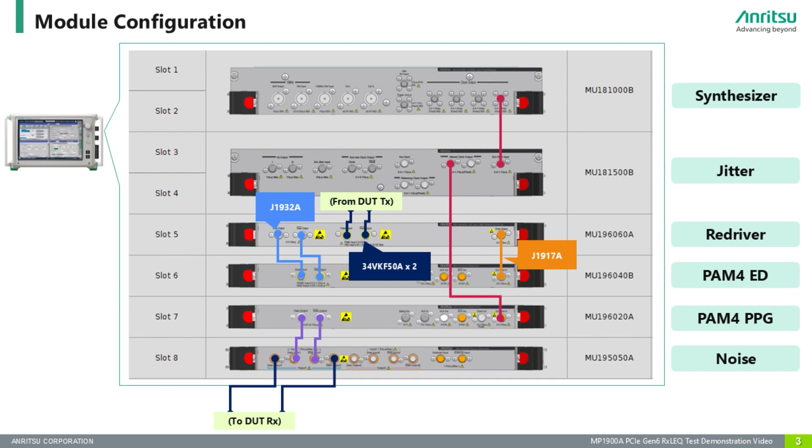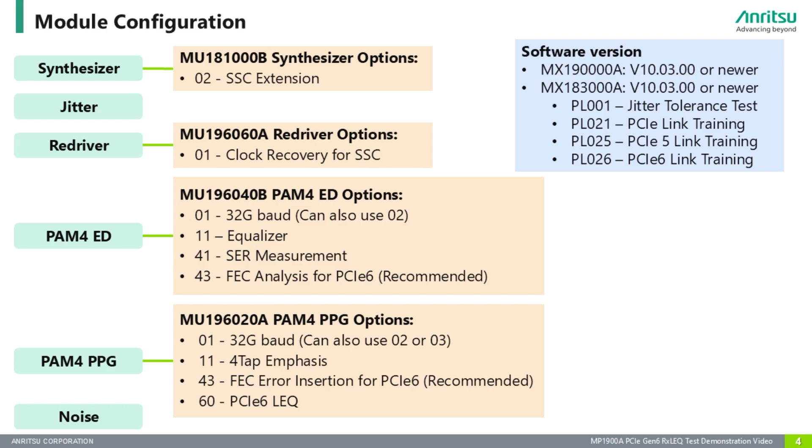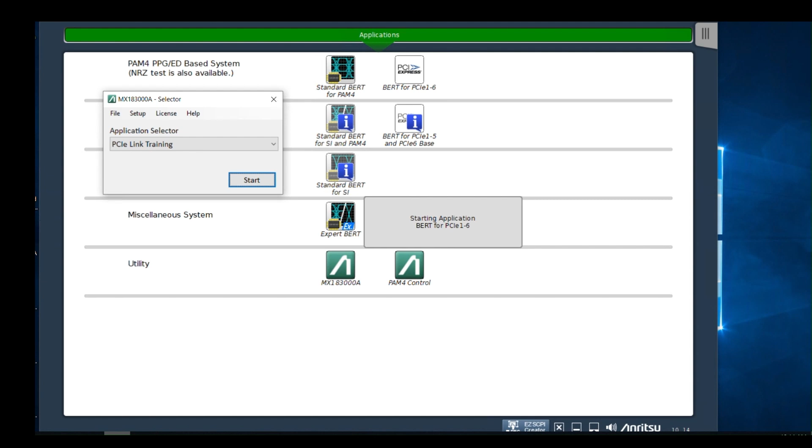These are the required module and software options. Next, let's move on to the test preparations. Launch the MX190000A software and select BERT for PCIe 1 to 6. Also launch MX183000A. Ensure that the module FPGA and firmware are updated.

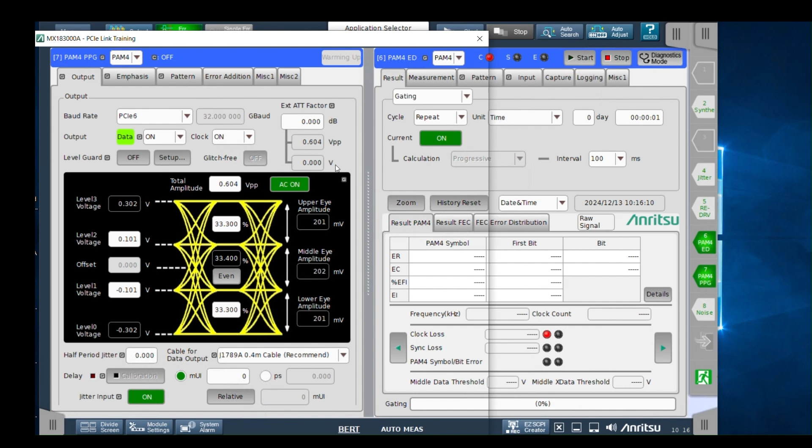Once the main application has finished launching, switch to the MX183000A screen and start the PCIe Link Training application. Click on Start Search and Connect. Click on File and initialize the parameters of both applications. After initialization, click on Operate MP1900A and move to the redriver screen. Turn the CTLE2 on and return to MX183000A.

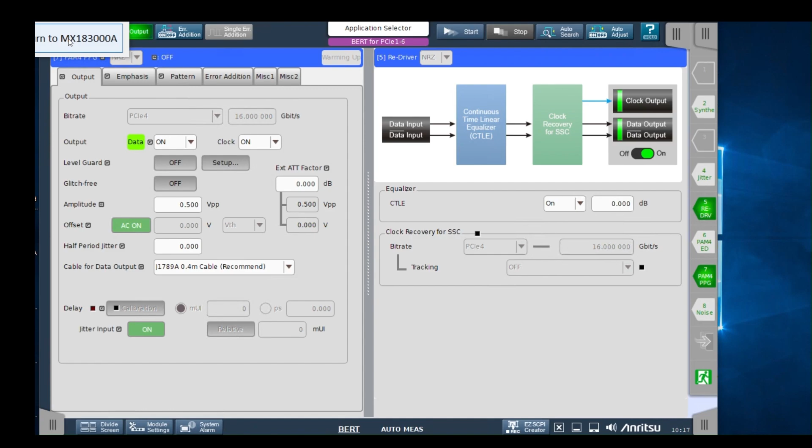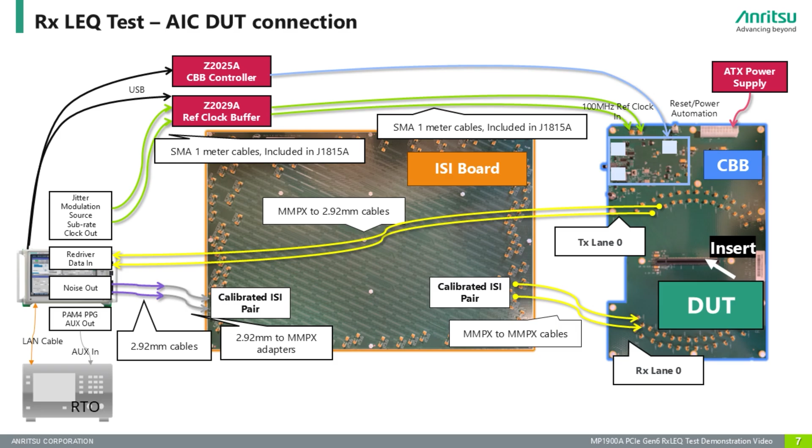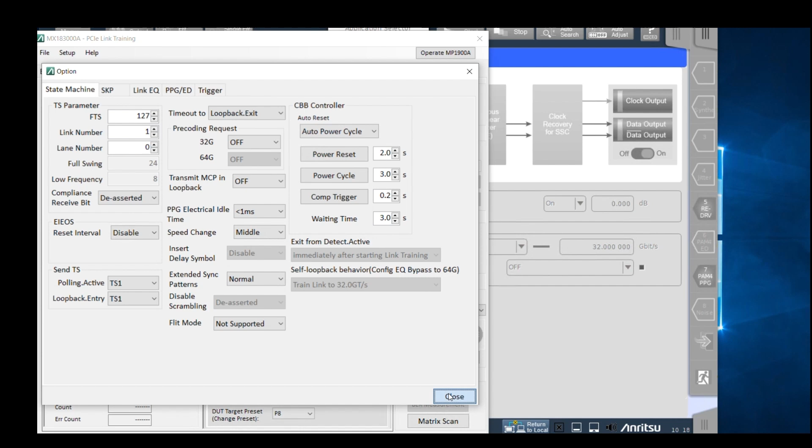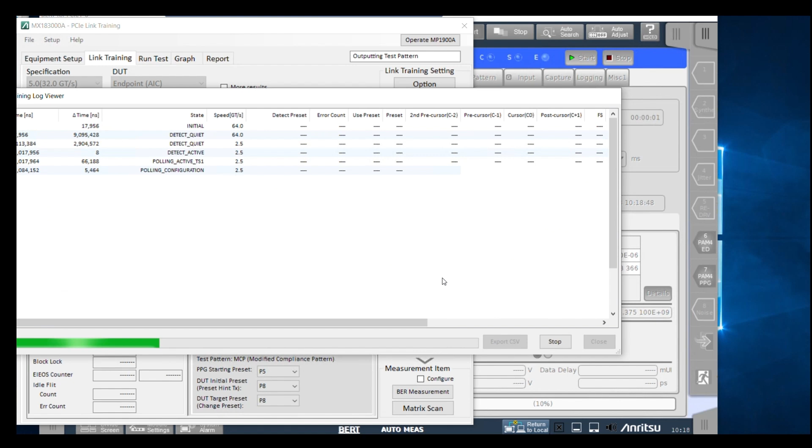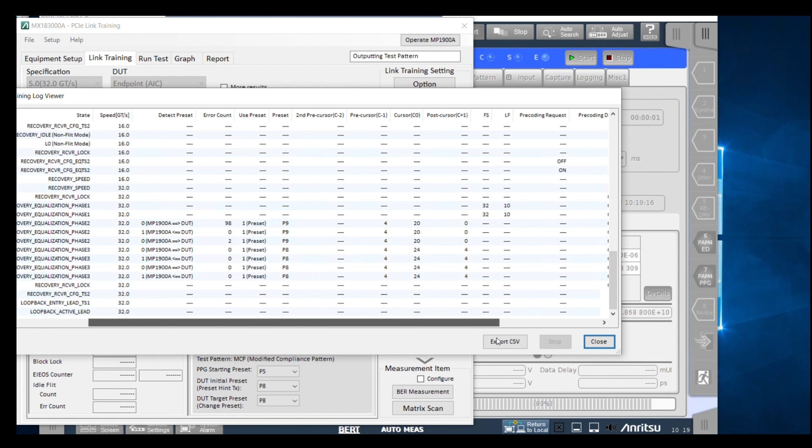With the LEQ test set to RxLEQ, click Apply. Click on the Option button to select the appropriate CBB controller settings and start Link Training. We achieved loopback active at the Gen 5 data rate. Click on the LTSSM log button to display the Link Training state transitions. Adjust the delay as needed to achieve the optimal bit error rate.

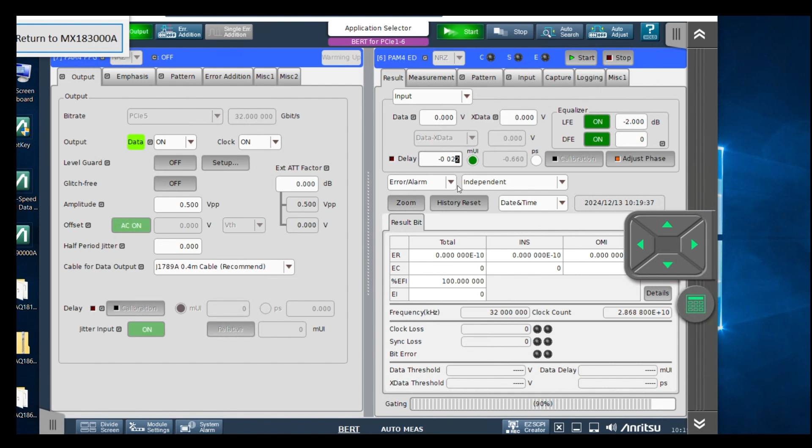Now, let's try Link Training at the Gen 6 data rate. For RxLEQ, presets from Q0 to Q10 can be set as the PPG starting preset and DUT initial and target preset. In the More Results tab, Gen 6 information such as 1B1B control skip, SRS clocking, and Flit mode supported bit can be displayed after Link Training.

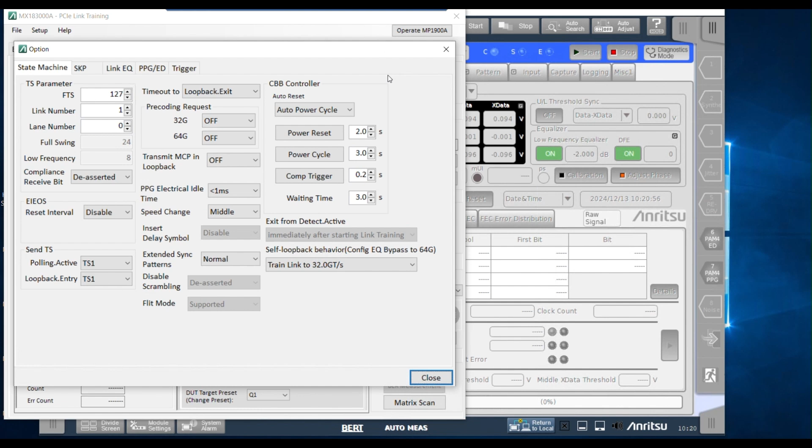In the Option tab, 1B1B skip interval settings, fine-tuning of link equalization presets, redriver CTLE, and AUX trigger output can be adjusted if necessary. For the Gen 6 PAM4 signal, in order to optimize the redriver and ED parameters such as threshold voltage, delay, and CTLE, perform return path optimization. This method uses the compliance mode of the PCIe device to instruct it to generate Gen 6 compliance patterns with the different presets. The compliance mode toggle signal will come from the MP1900A TX.

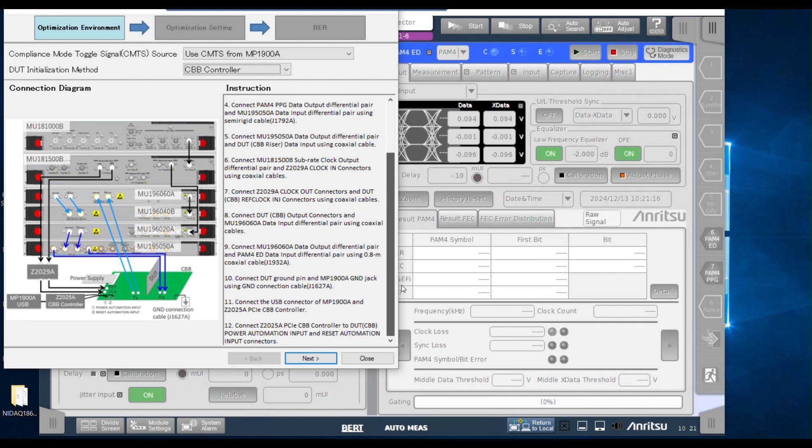Select the DUT initialization method. In this demo, we'll use the CBB controller. Select the auto reset method. Next, select the presets for optimization. And click on Start Optimization. The MP1900A will start putting the DUT in Gen 6 compliance mode for the selected presets. Using the DUT signals, the MP1900A Rx parameters will be automatically optimized.

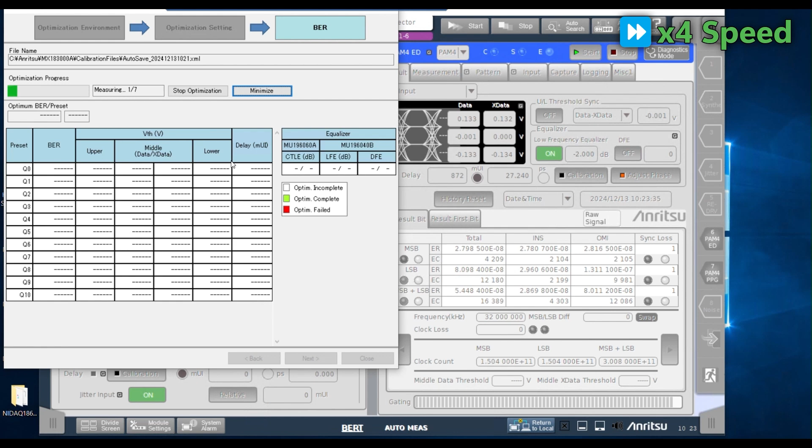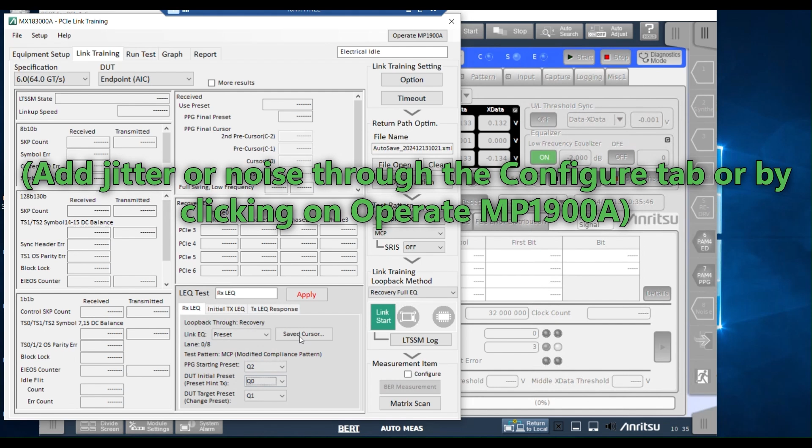We can see the optimal parameters, along with the resulting bit error rate in the table. This process will be repeated for each selected preset. After the optimization finishes, the best BER and preset combination will be displayed. Click on Close to proceed. Change the RxLEQ settings if necessary and click Apply. Note that you can add the necessary jitter and noise through the Configure tab or by clicking on Operate MP1900A. Then, start Link Training.

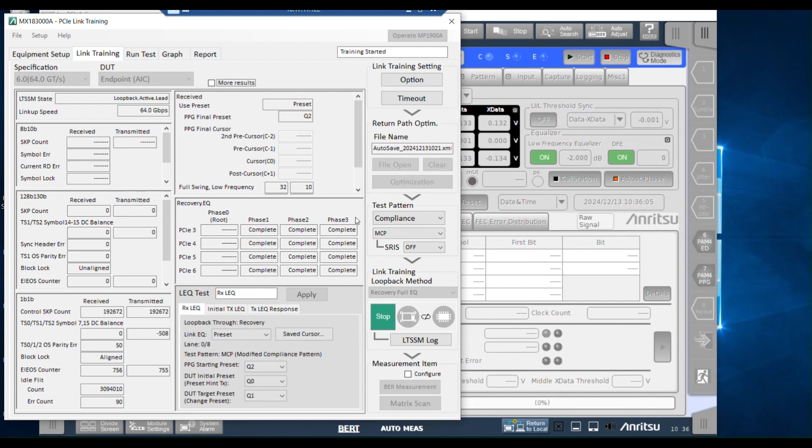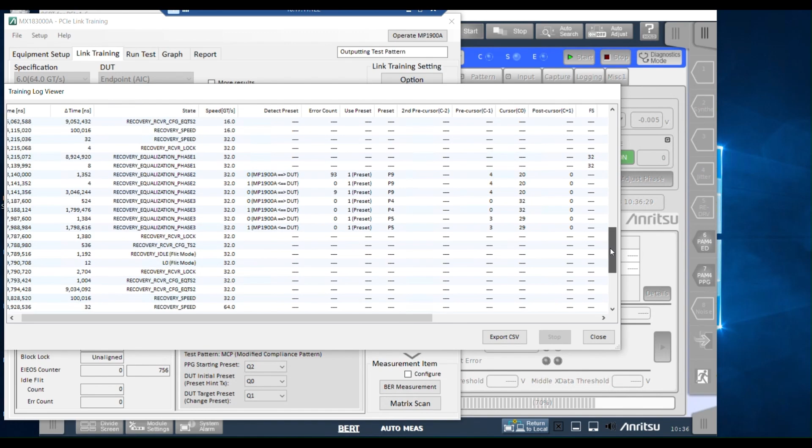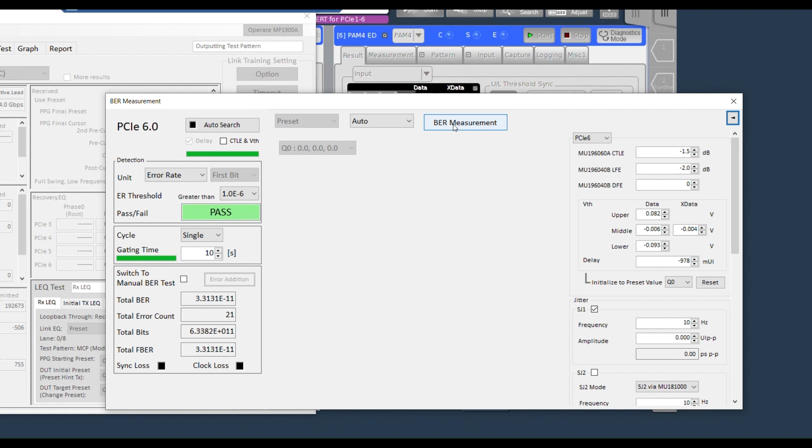We achieved loopback in Gen 6. Click on the LTSSM log for the state transitions and equalization information. We can see that the MP1900A requested Q0 and then Q1 as set in the RxLEQ tab. To measure BER, click on Configure and start Auto Search for delay. In this example, we achieved an FBER of about 3E-11. Let's start a BER measurement. The DUT passed because its FBER is less than 1E-6.

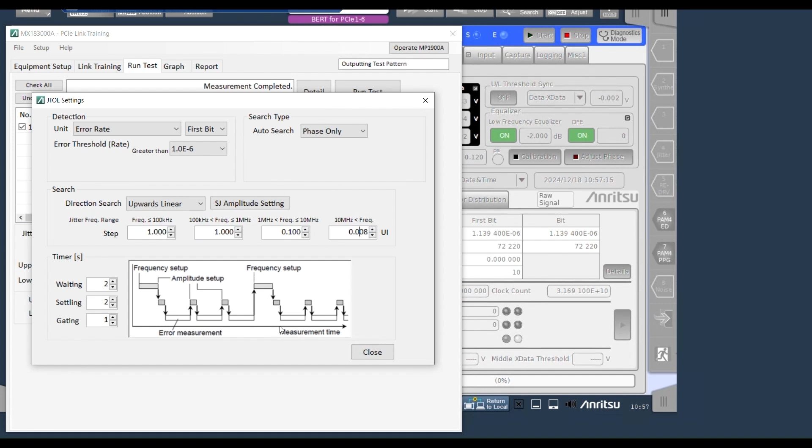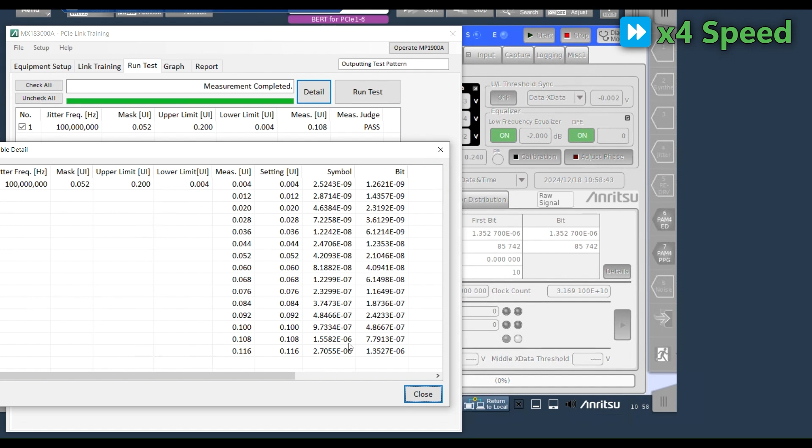We can also perform jitter tolerance tests on the Run Test tab. Adjust the test parameters on this screen. Open the JTOL settings screen for detection, auto search, jitter step, and timer parameters. If the settings are good, click on Run Test. This will automatically start an auto search if selected. Click on the Detail button to see the test progress. After the test finishes, you can access the Graph tab and also generate an HTML or CSV report file.

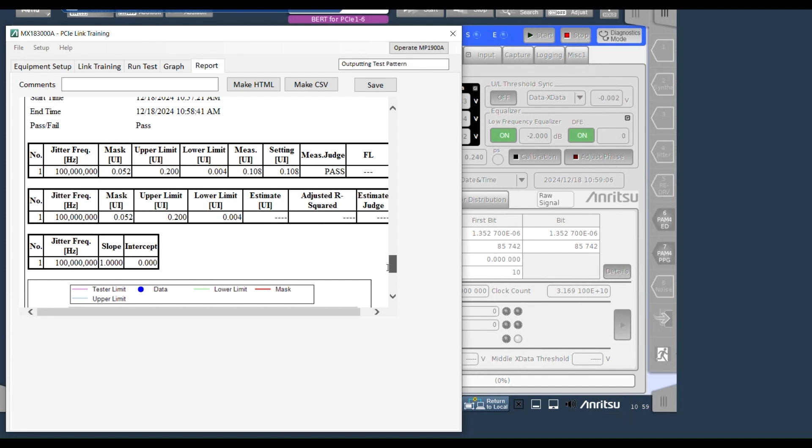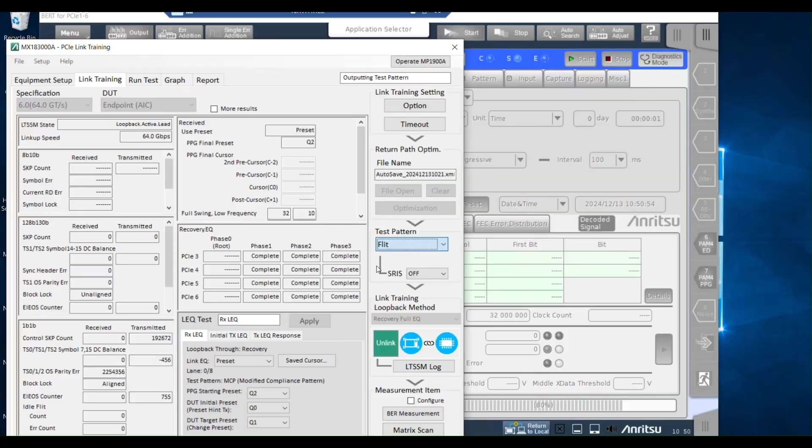The MP1900A also has helpful and convenient functions for Flit FEC debugging. The test pattern can be changed to Flit data. The PAM4 PPG has a new feature to insert PCIe 6 FEC symbol errors. The PAM4 ED has a FEC error distribution graph and a FEC capture function. Let's try adding FEC symbol errors from the PAM4 PPG.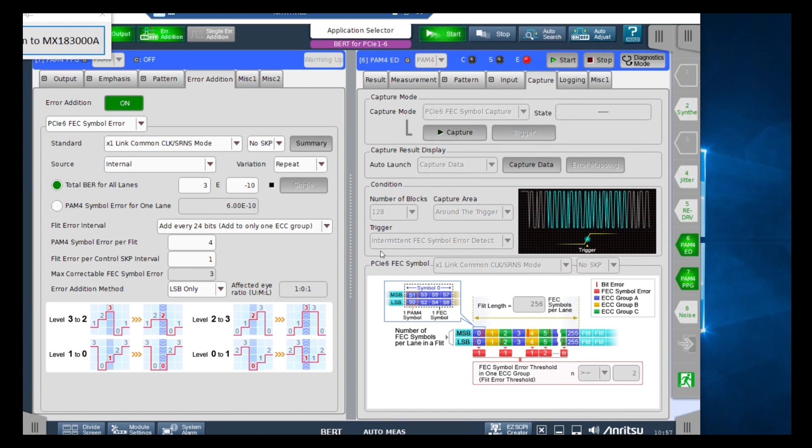Also, let's set the PAM4ED capture conditions to trigger according to the inserted errors. Turn error addition to on, and then start capture. We can see that errors are added every 8 bits, not distinguishing between ECC groups, as set in the Error Addition tab. Next, let's try adding errors every 24 bits, which will add them to one ECC group. This can be seen in the capture data.

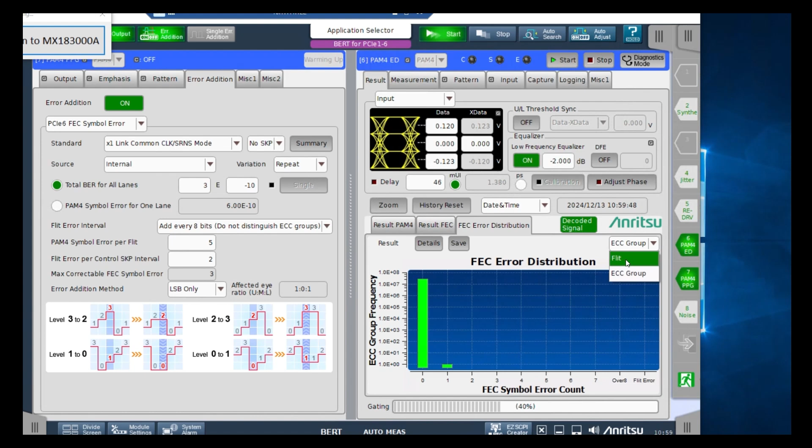The FEC Error Distribution tab provides real-time results with graphs versus Flit and ECC group. Detailed results of the BER, FBER, and Flit errors can also be accessed in real time. In summary, we were able to perform PCIe Gen 6 RxLEQ tests on the MP1900A with return path optimization, convenient FEC debugging functions like error addition and Flit capture, and detailed BER and FBER measurements.